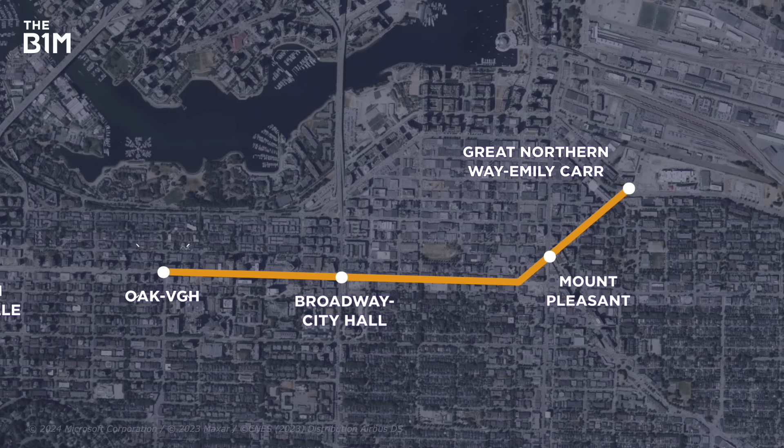Tunnelling works began back in November 2022 and took almost a year to reach Oak Street, where the 4th station is now being built. That's because digging through hard rock like this can be quite a grind, literally. Once the machine has made the hole, it has to place thousands of these rings behind it to make the tunnel lining.

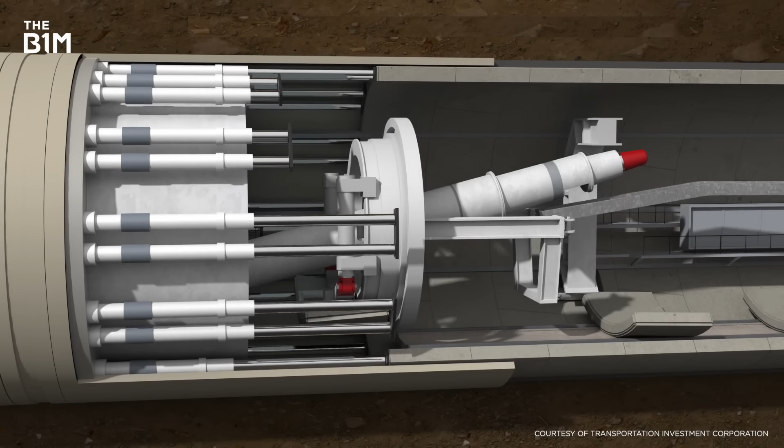They're sent through the tunnel using special vehicles before they're picked up by a crane and placed on a conveyor belt, which takes them up to the machine. The segments are then arranged in a full ring, which the machine uses to propel itself forward and carry on burrowing, travelling up to 18 metres each day.

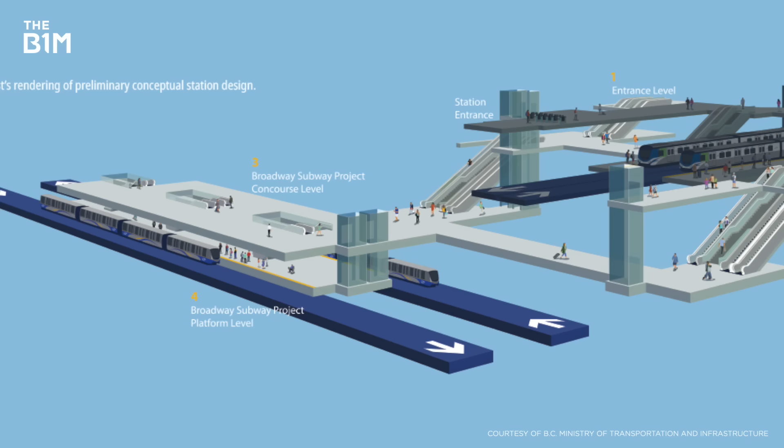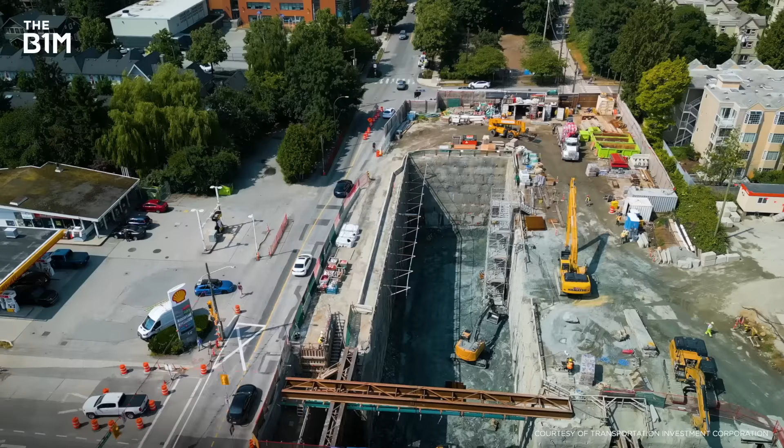At one point, Phyllis had to dig down to a depth of 22 metres. Why? Well, so it can pass underneath the other subway tunnel that runs from north to south in the same area, the Canada Line. Once both TBMs reach Cypress Street, next to the final station, they'll be dismantled and removed.

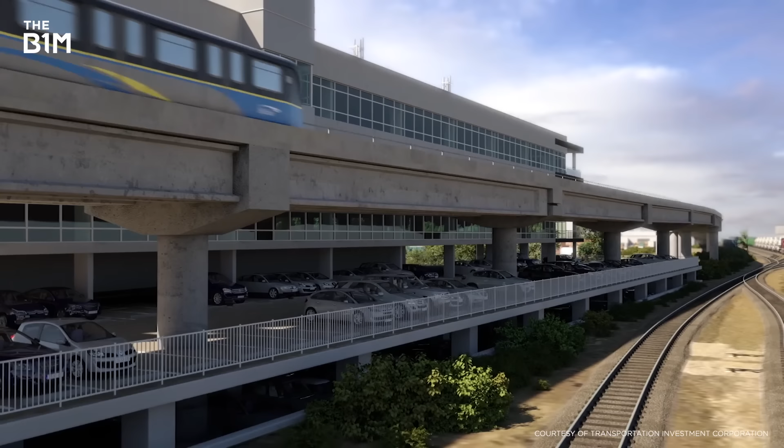It might be taking a long time to dig these holes, but passengers are going to move through them very quickly once they're finished. Acciona, one of 2 main contractors, claims a journey along the entire line will take just 11 minutes, saving the average commuter about half an hour each day.

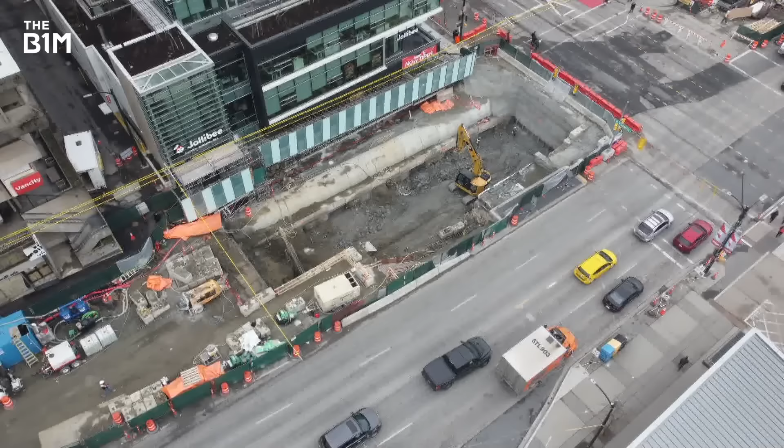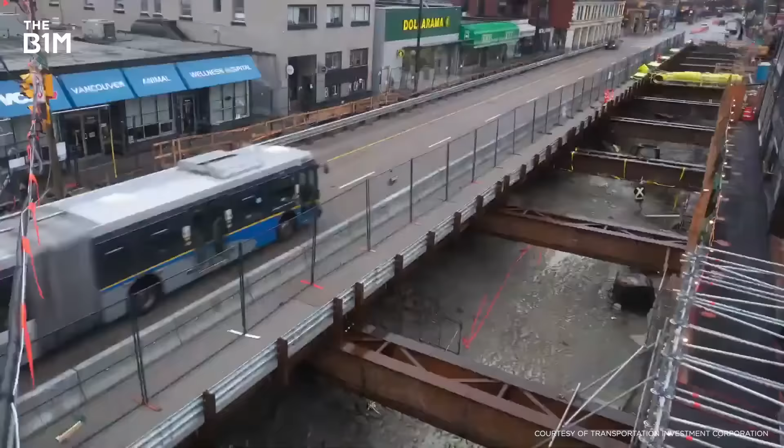Even so, with all this construction going on just below ground, it's got to be causing a bit of disruption, right? Well, not as much as you might think. To keep traffic flowing, temporary decks are being built along Broadway, ensuring one half of the street is left open to cars and buses throughout the works.

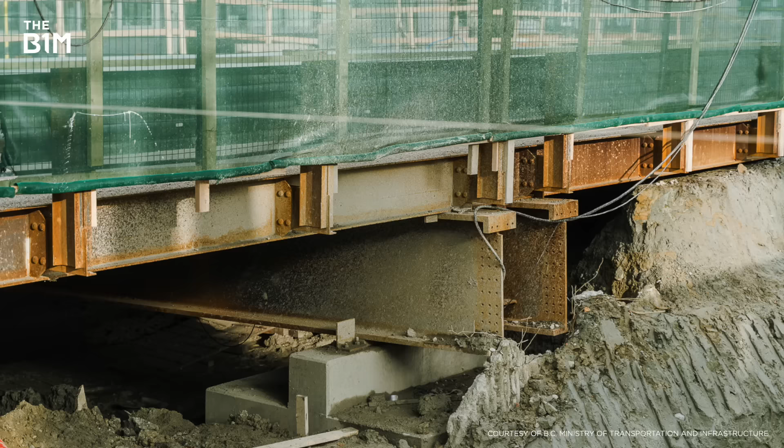To do this, enormous drills are used to make the 20-metre deep holes for the columns that support the deck. Next, the road is excavated to create space for the girders and deck panels that will form the structure, resting on concrete pads. Then on goes the deck, followed by the traffic, allowing work to carry on beneath before the process is repeated on the opposite side.

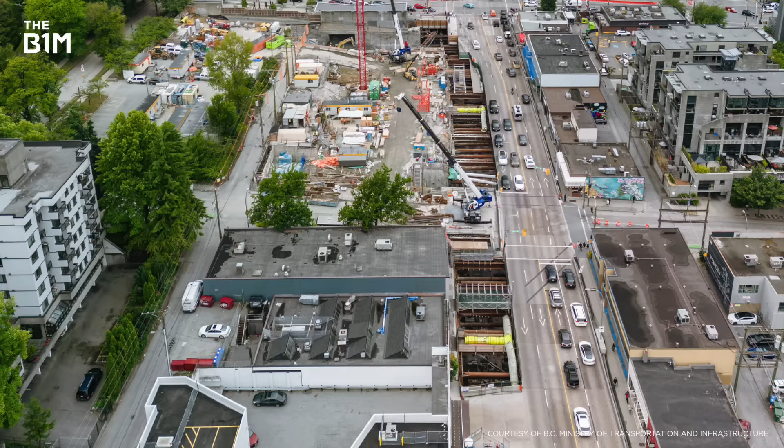They've also created dedicated work areas and storage spaces next to the station's sites. That's meant more building demolitions, but it's another move that's ensured construction is kept away from Broadway.

But as you might expect with a major infrastructure project, there have been some drawbacks. Some businesses in areas like Mount Pleasant have seen a decline in footfall or shut completely, blaming the construction works.

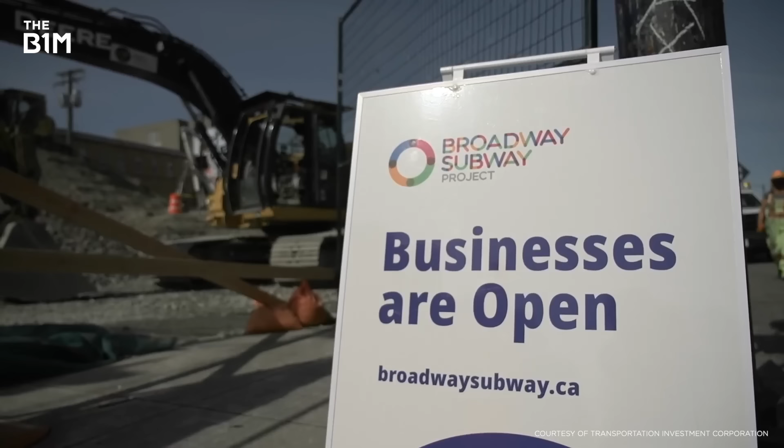Portside Interiors is one of many businesses blocked by the maze of construction for Vancouver's Broadway subway. People are finding it too difficult either to figure out whether we're open or to get access.

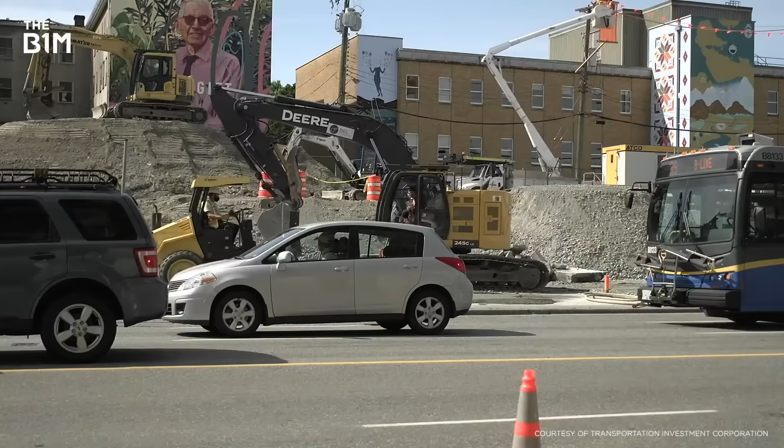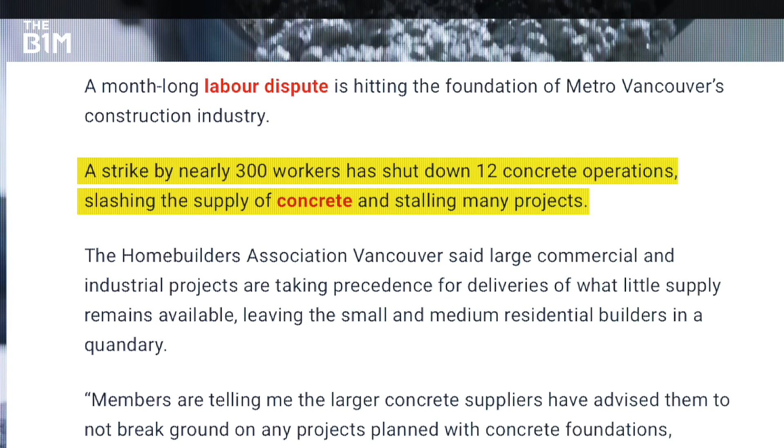Others tied to the project have also been making a stand, but not against the new subway directly. Nearly 300 concrete plant workers went on strike in 2022, affecting the supply of the material across the region. This delayed the start of the tunnelling and pushed back completion of the whole scheme from 2025 to 2026.

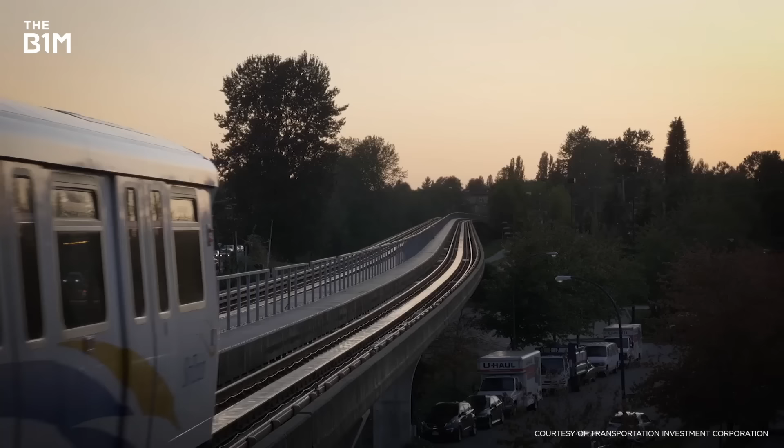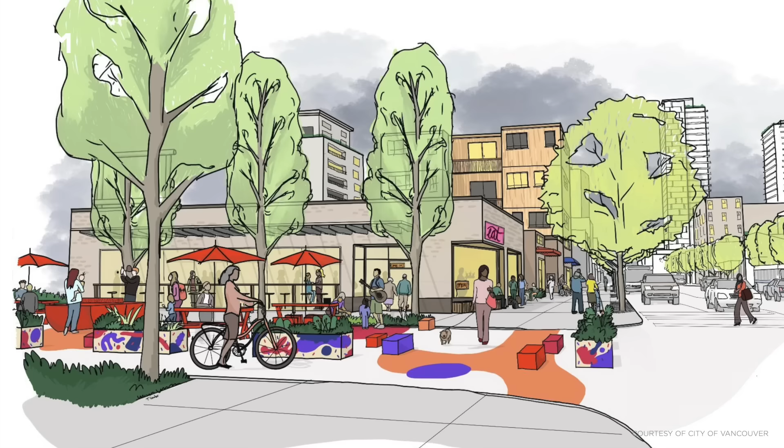Once it completes, Vancouverites can expect to see the skyline around Broadway get significantly taller, as construction on the so-called Broadway plan finally begins. That's Vancouver's idea to build a second downtown by replacing many of the low-rise buildings with high-rise ones. The result will be more space for homes and businesses, but the effect that would have on people already living and working here has become another contentious subject.

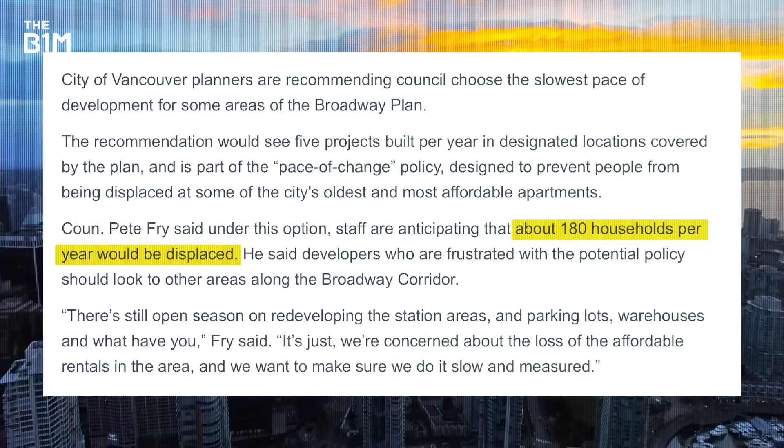In early 2023, a plan was put forward to limit the number of renters who would have to leave their homes and make way for new buildings. It was rejected by the City Council over fears it would have slowed down the much-needed development. However, those who do have to leave are going to be offered another rental at the same rate and get the chance to move back into the new building, again without having to pay more.

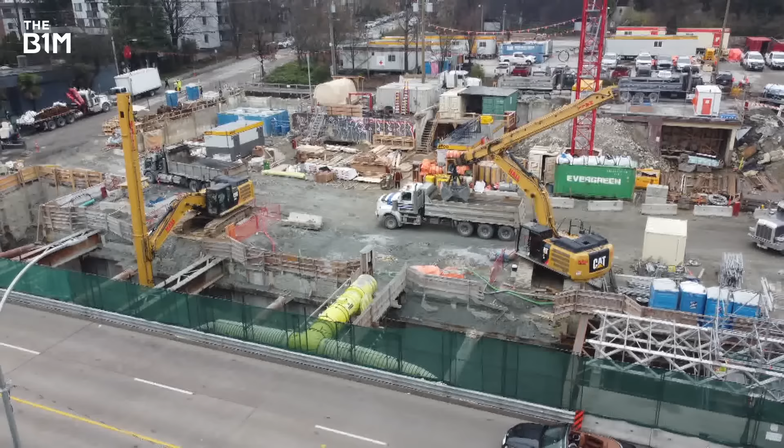With years still left to go on the subway build and the Broadway plan yet to even start, more backlash in the future is perhaps to be expected.

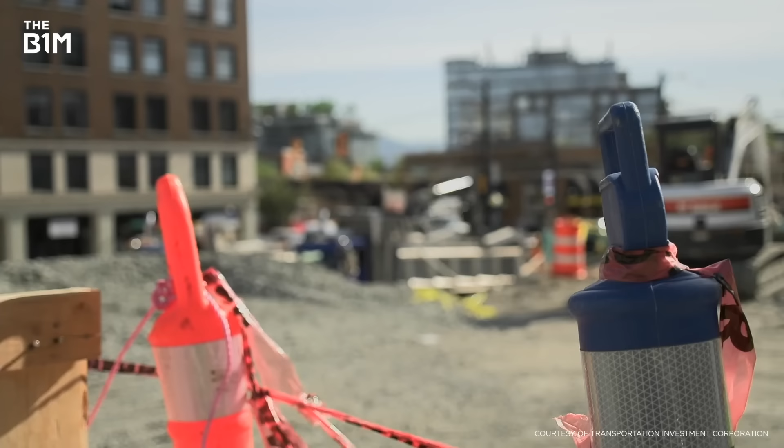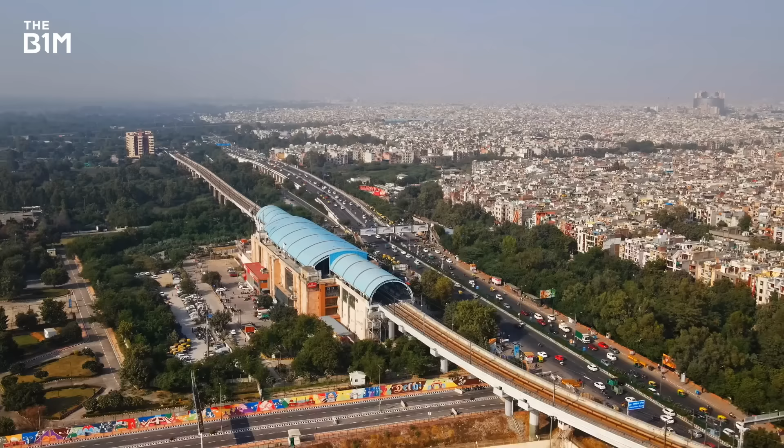But as we've seen with construction projects time and again, some disruption is kind of inevitable, especially where infrastructure and real estate are combined. But they often prove beneficial in the long run, even to those who were impacted along the way. Hopefully, we'll be able to say the same here.

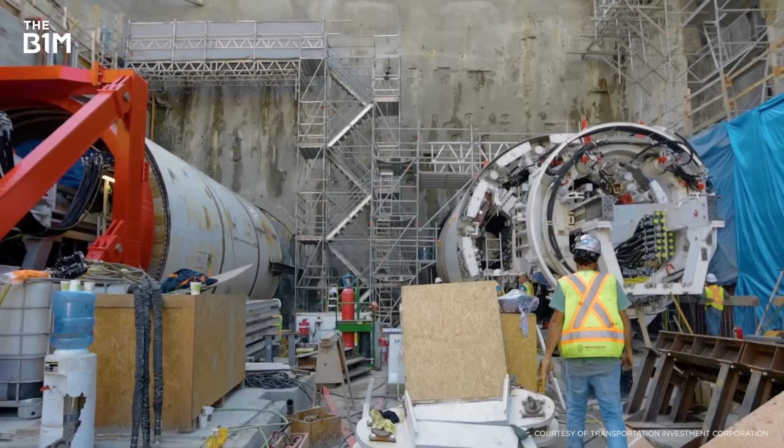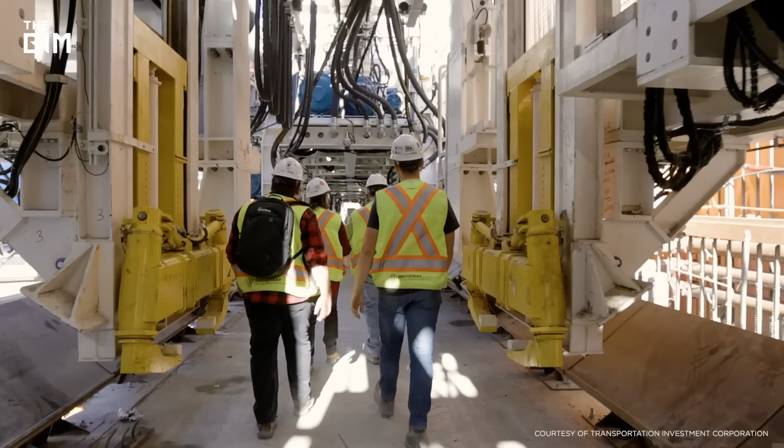Over the next 30 years, Vancouver's already bustling Broadway corridor is set to become even busier, and it simply won't be viable without an efficient transport system in place. The new subway might not be universally popular, and not everyone appreciates the awesome engineering going into it. But it's a project that could turn Vancouver into a truly livable city where you can actually live for years to come.